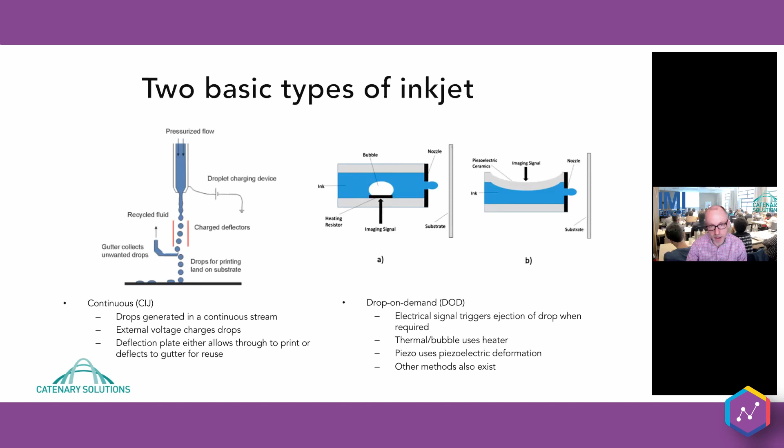And there you're creating a drop by some kind of mechanical deformation of an ink chamber in response to an electrical signal. So you use a piezoelectric material, and as the diagram kind of shows there in principle, what you do is you add an electrical signal, and that squeezes the ink chamber in some way. It could be that way or that way, and that generates an ink drop. So that's an extremely brief introduction to inkjet.

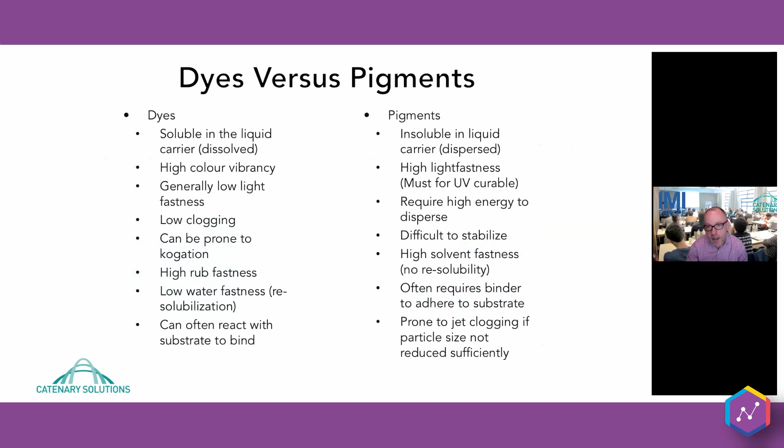And so, as I mentioned, pigment inks, they are what you really need for high light fastness. You have to use them in UV curable inks, as we mentioned, because otherwise they get bleached by the curing method. But they are more difficult to make inks out of, and they require a more complex formulation.

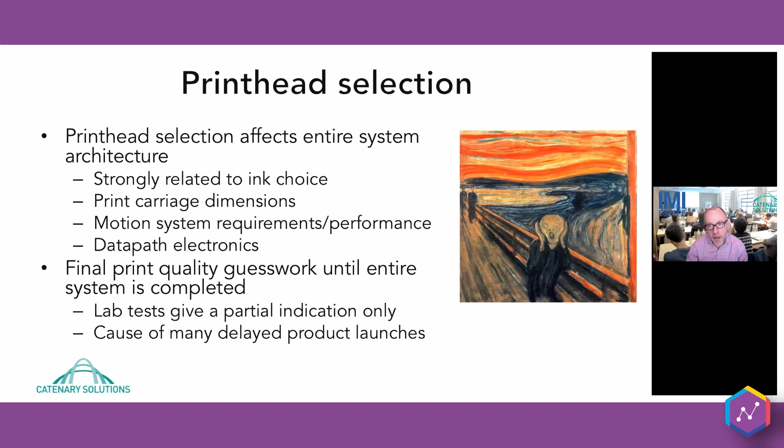Briefly onto printheads. So these are the kind of mechanical part that's at the heart of the inkjet printer. The printhead selection is very much a fundamental part of choosing your system, either choosing the system that you're going to buy that's already been built, or if you're a system builder, choosing which printhead you use in order to create your system. It's a choice you have to make very early on in your system design, and it's also a choice that locks you in very much.

And the reason why the picture of The Scream is there is because you can certainly realize, and I've had experience of this myself, several years into a development process, thinking, did we perhaps make an incorrect printhead choice? Because if you have, it's very, very difficult then to change, because it affects the ink choice that you've made. It affects the way the printer has been designed, both from a software point of view and a mechanical point of view. And trying to change that is very difficult and very expensive, and introduces time delays.

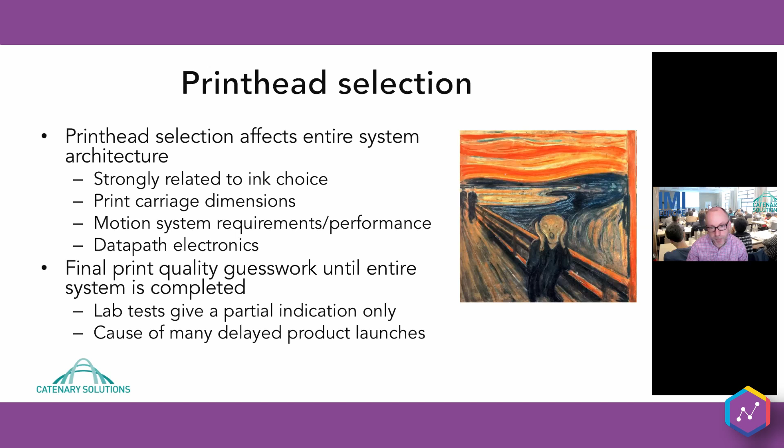But the print quality that your system will give is really only known for sure once you've built it. So that's a real fundamental dilemma at the heart of every system design process that's gone on in the last 20 plus years of development. And when you see a lot of grey-haired people in the inkjet industry, this is one of the reasons why. There are lots of other ones as well.

So we're going to talk about piezo DoD, as we mentioned. That's the key technology, and we're going to go into more detail about that in the seminar. The main players in the market that are relevant to the decor printing industry, so really talking about printing water-based inks with high resolution and high speed, and probably on a very wide system with a large number of print heads. These are really the key manufacturers of interest here. From left to right, we've got Kyocera, Fujifilm Dimatix, Ricoh, and Konica Minolta.

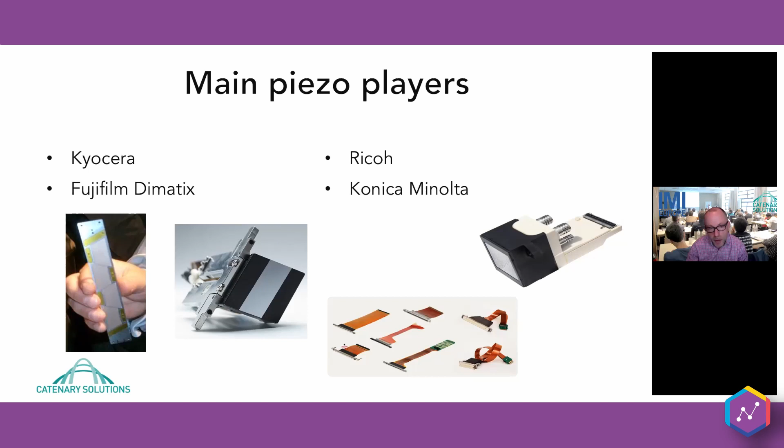So again, in the seminar, we're going to look at some of these things in more detail, how they work when they're put together in a large number of print heads in an array to make a large printer, and all sorts of aspects like that as well.

And again, that's something that needs to be understood, because as I mentioned near the beginning, the ink and printhead interaction, in other words, how the drop is formed from the printhead, is completely fundamental to the way the technology works, and therefore how it doesn't work as well, if that's the case.

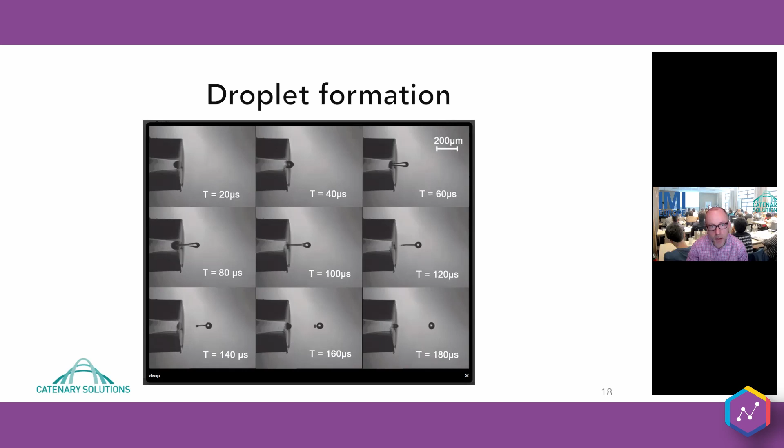So I mentioned system integration, and I'm just going to give a very quick overview of this. This is a picture from Xennia, where I used to work, but it's a very nice way of summing up how inkjet technology works. So you have a circle there. I'm sorry, I can't point at things on the screen, but you have ink chemistry, you have the print heads, and we've talked about the interaction between those two. Then you have the motion system at the bottom, which either moves the print heads or the substrate, or in some cases both. What it does is try to ensure that the ink drop lands in the right place on the substrate. And then, of course, you have the substrate.

There are all sorts of challenges with those four key parts of the inkjet circle, and they're connected together by various things. As I mentioned earlier, they can be fluid dynamics, chemistry, electronics and software, mechanical engineering. All sorts of aspects need to work together. And just that one brief picture shows you all sorts of different things that need to interact in the correct way. And if any part of that circle is broken, you have a problem that needs to be solved.

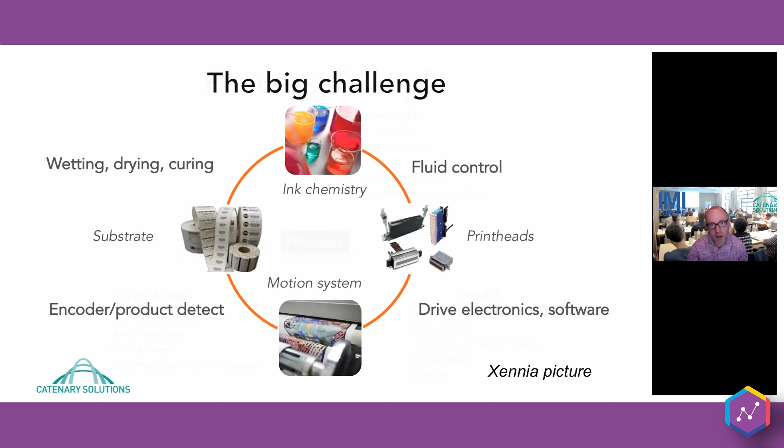Another way of looking at something similar is to look at that as a process triangle. So you have the ink with all of its parameters, you have the substrate with all of its parameters, and you're hoping to deposit that ink onto that substrate. And the thing that you use is the printing system at the bottom right, and that has parameters and constraints and limitations as well. And so you need to understand how these things work in a complete triangle with the process at the center.

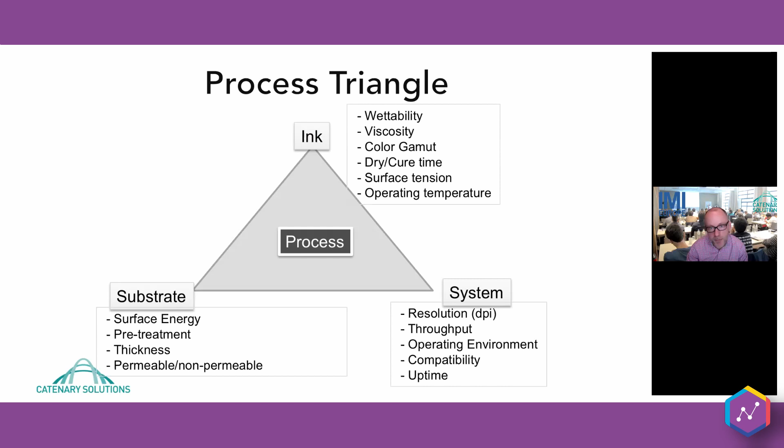So fundamentally, the interaction between the ink and the printhead and the substrate has to be right. The ink drops need to land in the right place at the right time every time, pretty much, in order to make this work. And we're talking about billions or tens of billions of drops needing to do that with reliability. We have to build the machine robustly and soundly.

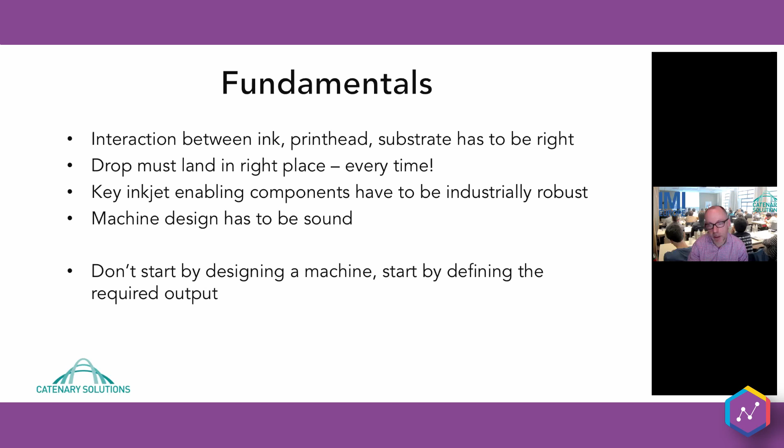And the last point there, we need to define the output. So what we're designing is a process. What we're designing is a way of producing a printed decor pattern. The machine is the way that you achieve that, but what you're doing is designing a process. So again, that's a very, very quick way of looking at system design.

Then we're going to look at surface behavior. So this is a very complicated slide just to mention how complicated this is. So we're talking about drop behavior. At the bottom, you've got a drop that's landed onto a substrate. It's then going to do a number of different things. It might absorb into the substrate.

Some of the carrier, the water or the solvent, may start to evaporate. The components in that system may evaporate at different rates and give you changes in composition in that drop while it's drying. You may get precipitation of things that were previously soluble becoming insoluble in that drop. So there's all sorts of things that can happen on the surface, and that's just for a single drop.

So there's another layer of complication if you add extra drops onto the surface at the same time, and of course you are going to be doing that with printing. The interaction between those drops gives loads of extra complications as well.

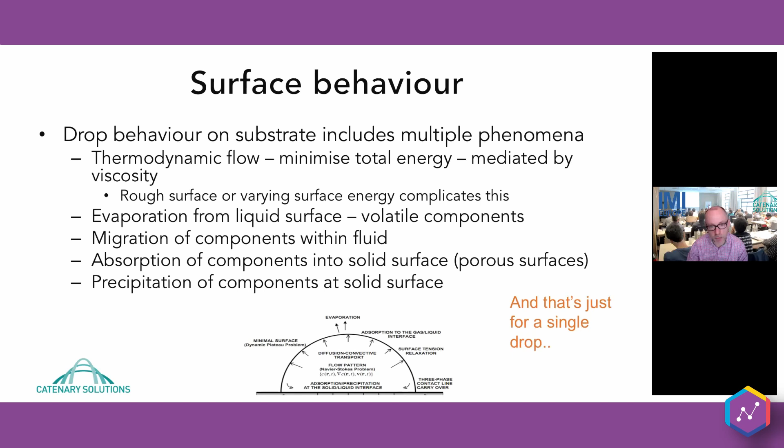So image quality, which we said is fundamental. The goal is to create an image that looks good. And by good, we mean something different depending on what the application is. But fundamentally, we're trying to produce something that passes some sort of customer test. Does it look as good as you and your customer hoped it would? And that's obviously a qualitative test in almost all cases.

But related to that, there are very much quantitative parameters: do the drops land in the right place? Have they got the correct size, the correct shape, the correct sharpness? Does the spread of the image on the surface work in the way that it was intended to? And behind that, of course, is all of the technology in terms of were the drops ejected at the right size, at the right frequency, at the right time. So again, a relatively simple slide summing up a complicated process.

And what affects print quality? Well, the short answer is everything affects print quality. Again, if you come away with one thing from this short introduction, it's that inkjet requires interaction between different types of technology. So all of these things on the screen are the different aspects of the inkjet printing system. And by system, I include the ink and the process and the substrate as well. The interactions between those affect image quality as well. So we need to be in charge of all of those things.

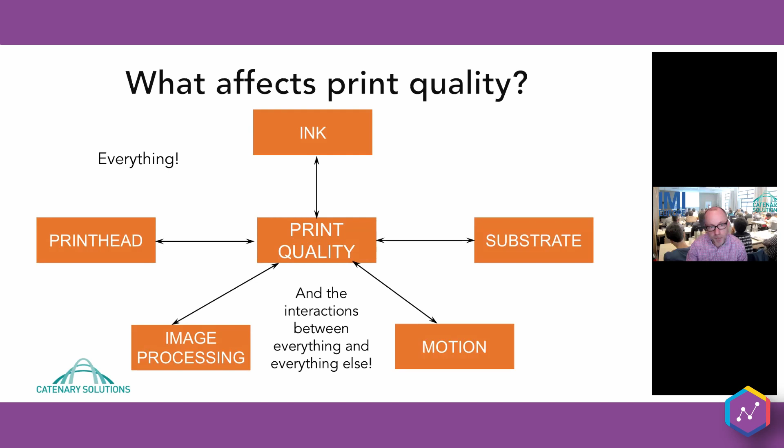And so just for examples, things to do with the printhead affect print quality: the size of the drops, the uniformity of the size of the drops, the straightness of the ejection of the drops. The ink we've mentioned, the ink-printhead interaction, so the drop ejection, the ink and substrate interaction, so what happens to the drops on the surface, how the motion system works, how well the printheads are aligned to each other,

how you process the image in order to turn it into a set of instructions to produce drops, how the printed image is dried and post-processed, which is a very key one for decor printing, for example, where there is a complex process that's going to occur after you've printed this image. So all sorts of factors are affecting the print and image quality.

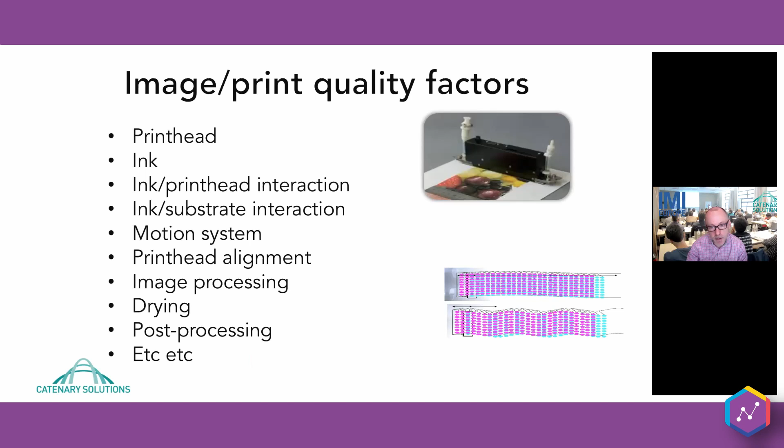So how does this apply to decor printing specifically? Well, generally speaking, for the laminate process, which I guess is the key one, there are examples of other ones as well, but just focusing on that one for today. We're talking about using a very wide single pass inkjet system, printing a large amount of paper per second or per minute. We're talking about using aqueous pigment inks, and they have their own challenges, which we'll go into more detail in the seminar itself. We need to produce suitable print quality onto laminate paper.

And laminate paper is quite an absorbent paper, so just producing a suitable image quality onto that paper is a challenge for inkjet printing. We need to ensure that the print is compatible with the existing lamination process, because in most cases that's a given. It needs to fit into the existing lamination process. It needs to be industrially reliable, so it needs to work day after day, week after week in the factory. That's what people are used to from other types of printing technology.

There needs to be a realistic cost structure. By that I mean both the cost to buy it, but also the cost to run it. And different to Flexo or something like that, a very key part of the cost to run it is the ink cost. It's a very small part in traditional printing, generally speaking, because the inks are very cheap. But for inkjet, it's the major cost of running a printer. And that needs to be understood, whether that can be tolerated within the cost model you've got, whether there are opportunities to reduce that cost and still get the quality of product that you're trying to do. So all of those things are challenges.